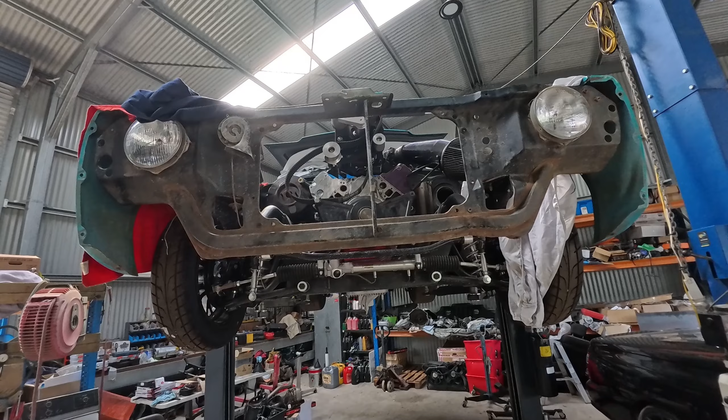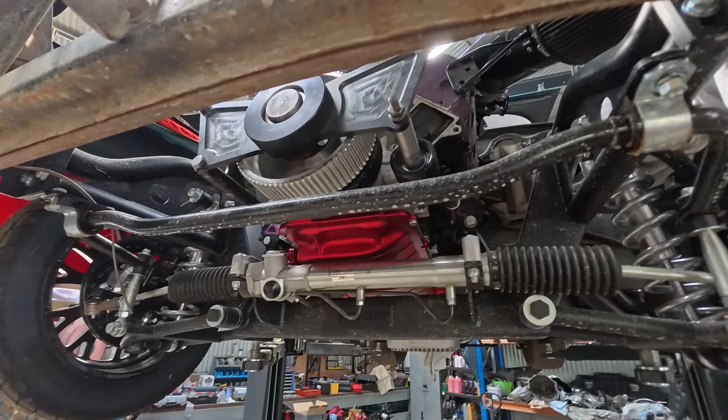Righto guys, so back here today. Today has just been a very big day of, now that we have everything dummied up, finding parts that are going to work, coming up with a list of parts, getting it invoiced, etc. Starting to work out what we're going to run. So Castlemaine make a high mount alt and a high mount AC, which are going to work great.

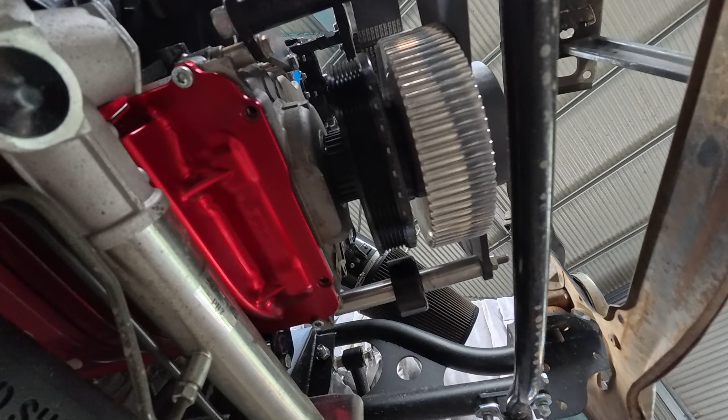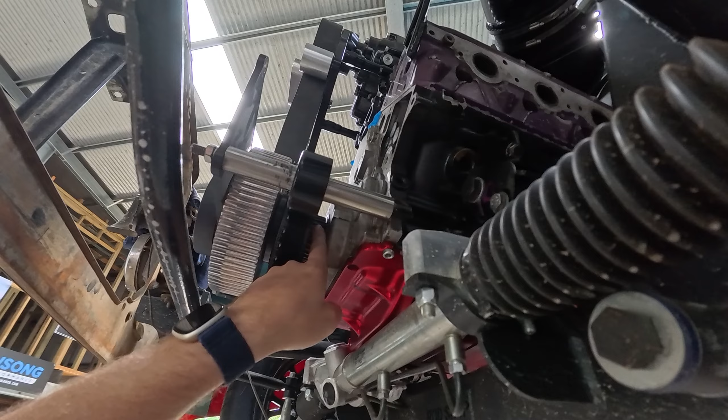Now, unfortunately, as we talked about, the only way that we're going to be able to get this dry sump setup to work the way it is, is to have a pump mounted on this side. We're not going to have enough room for the depth of a pump for it to be forwards from where that's driven from. So it's going to have to be reverse mounted, which means it has to be reverse rotation.

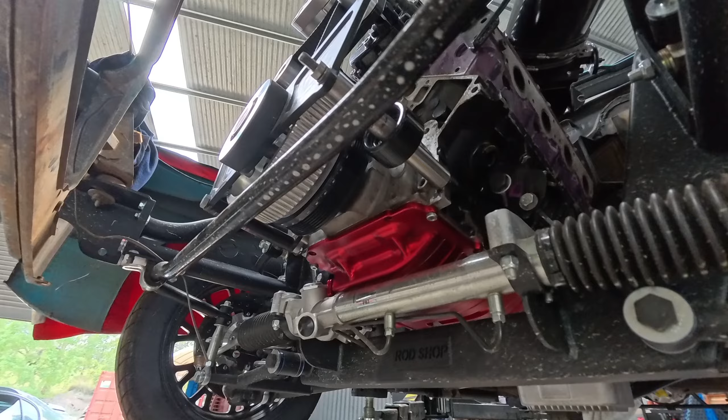And I am frantically asking everyone I know that has a lot more experience in dry sump setups than we do about whether they are aware of any dry sump pump on the market that is reverse rotation or not rotational. We admittedly are not experienced enough to know whether they are rotational or not. We have to assume they are because of the way pumps inherently work.

So if there's any on the market that are omnidirectional or reverse rotation that are going to work, that's about the only way we're going to be able to make this work where this is driven from in the guise that it's in, because of all the stuff we've got going on here and how close the engine mounts are to the front and our steering rack. So it just is what it is. That's what we're dealing with.

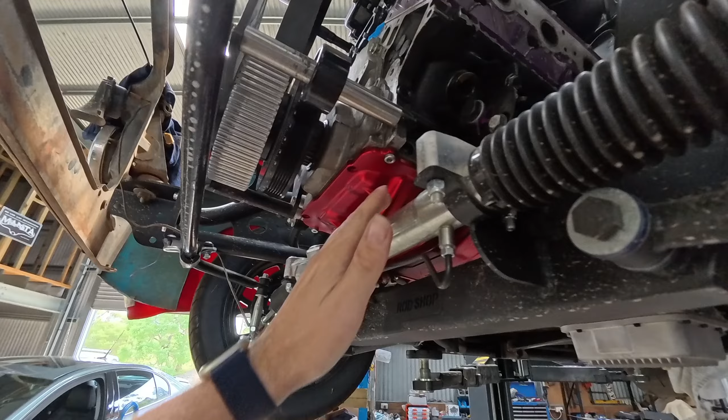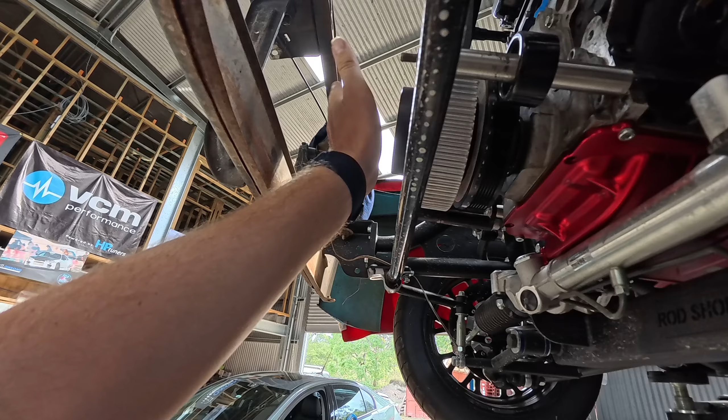If there's nothing on the market that's going to work that way, the only real solution that I can see is to ditch this crank support altogether, hit up Joe Blow and get an internal crank support, which is built into a billet timing cover that supports the crank from back here, and then get an oil pump drive that comes off the front. So instead of having this crank support here, you'd have an oil pump drive off here, which then obviously gives you all of this room here to have an oil pump.

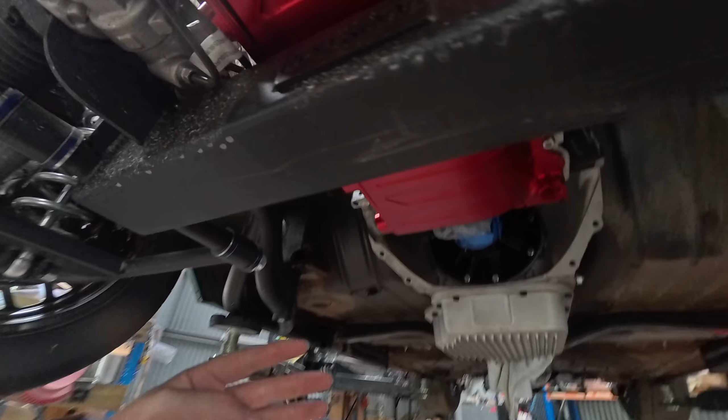It's driven right off the front instead of being driven right at the back from everything and needing all that depth. Obviously, we'd still have to sort out another sump that has all the ports on this side, or at least just the ports at the back on this side, either or. Obviously, we just need a sump that's going to work.

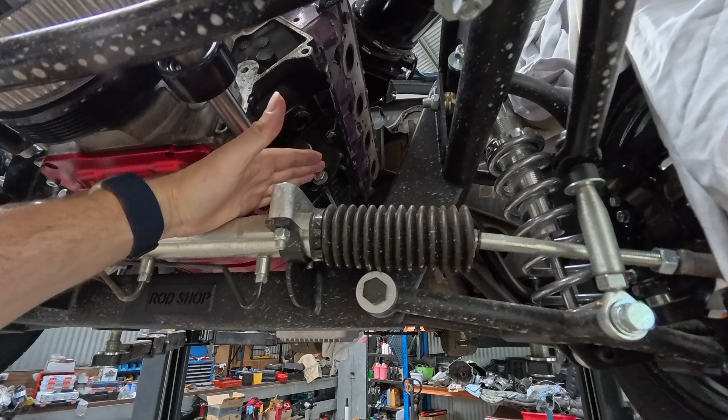And as we talked about last night briefly, even if we went wet sump with an external pump, we are still going to have the same inherent issues of having to mount a pump somewhere. And in the guise that it's in, it's still going to have to be most likely a reverse rotation pump, because we just don't have the depth with that engine mount. And because of the way the front end is all built in one piece and the way the engine mounts are, to modify the engine mount to make this work would just be a nightmare. Not really keen on entertaining that at all.

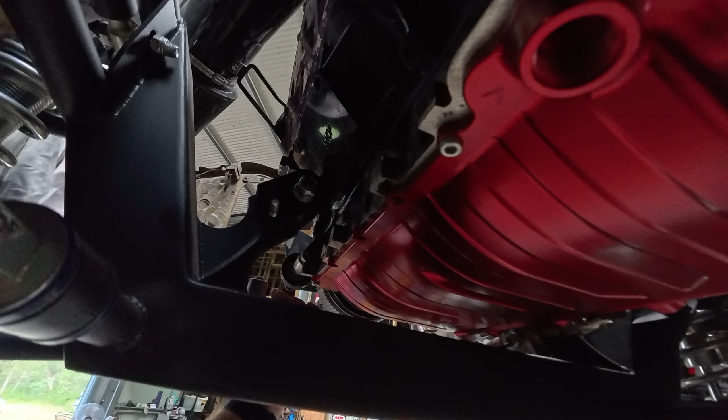It pretty much has to be a solution with the pump side of things and the sump, and not a solution with modifying the engine mount, because the whole way this front end's all built and integrated and the way the engine mounts are, not happening. So anyway, that's where we're at with it.

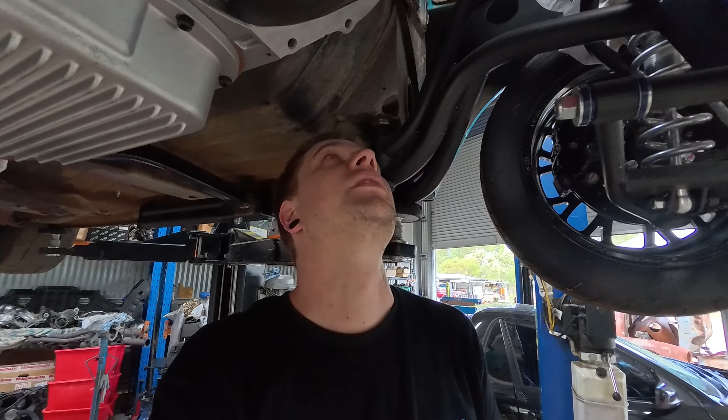Apart from that, steadily finding things. Whipple actually do now make a fly-by-wire throttle body to suit this blower, the reverse entry. We're just gonna have to get one from the States, which lately things from the States seem to get here quicker than anything from Australia. The way freight has been this year, it's been an absolute nightmare.

So otherwise the solution was gonna have to start looking like a 3D designed adapter to go from the blower entry to like twin 110 mil round throttle bodies or something, and run a twin throttle body setup to get the airflow that we need. But anyway, that's going to be a better solution if we can get one from the States.

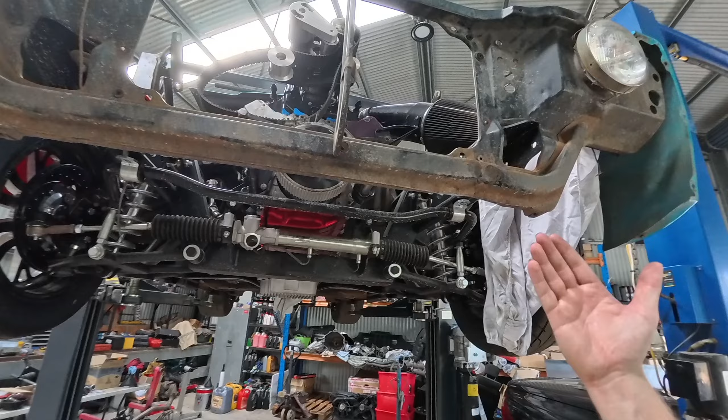So anyway, at this stage it's just planning, finding solutions for the issues we're facing. We've sorted out a radiator layout and got the owner to order a radiator from his radiator guy, steadily working through the issues that have arisen. Anyway, it's all part and parcel as far as very highly custom, highly aftermarket, high performance builds like this go. It's good to showcase it. People, I don't think, realize or understand just how much careful planning, custom work, and solutions to issues go into builds like this.

It's not like it's just a general mechanical thing where everything's just off the shelf, buy it and bolt it in and stuff. And this is why we don't do very many of them anymore, because for how much time we have to put in, we don't really get paid very much, realistically. I've nearly spent all day today just planning out, finding parts, getting prices, emails, asking questions, finding solutions to these issues, and it's not really billable time.

So we do these things because we really enjoy them, and a build like this really gets us excited. So that's why we do these. But yeah, I'll showcase the best I can the issues we have to overcome and the adversity and what happens with these things, because it's an immense amount of work. Not that I've not done it before with HQ, King Barra and that sort of thing. It's been done plenty on the channel, but just so that you can see.

So with this setup, we will be doing a complete intercooler kit as well, intercooler setup. So we'll have our radiator, obviously behind the radiator support panel. We'll have our oil cooler and our trans cooler in front of that. And then in front of that, we'll have a nice big condenser, AC condenser, which is going to work for obviously our AC inside the car, which I'll get to as well, and our intercooler setup. And then the intercooler will be in front of that.

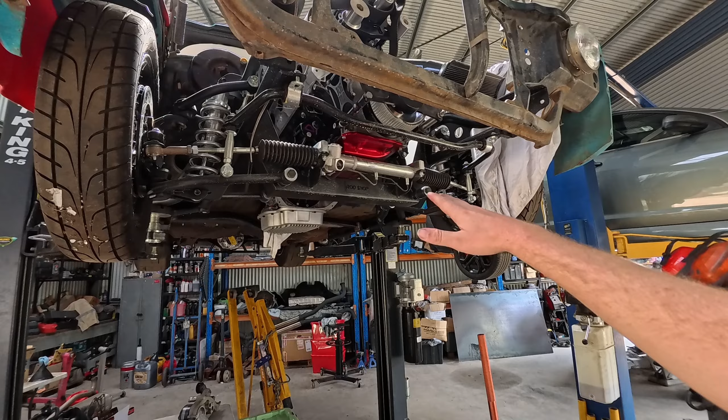Righto guys, another long night and day of finding solutions, getting things together, sorted. And yeah, it's been decided we are going to go internal crank support. That's what's going to happen. We're going internal crank support. We're going to have to order a new sump with fittings on this side or just at the back. Something that's going to work with this steering rack. And with the internal crank support, it obviously gives us this much room for a pump.

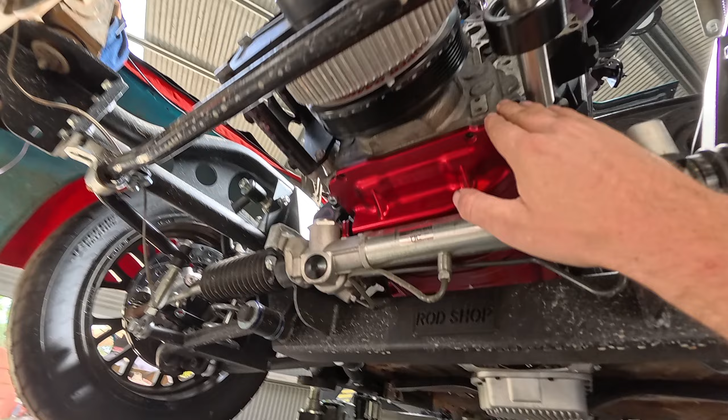So I'm looking at the moment at potentially a Savvy Motorsport pump for the bracket that they make for this side of the engine and the pumps they supply. It appears to me that it's going to be the one that's going to fit with the least amount of modifications. Obviously still going to need a lot of modifying to fit our setup with the blower drive and everything, but it looks like it's going to be the closest. So that's what I'm looking at the moment. I'm just trying to ask a few more people that are more experienced with dry sump setups whether they're a good pump, what they've heard of them, what they know about them, etc. And we'll find out some more info and probably go that way.

So with all that said, we've now got a whole heap more parts on the way to keep this thing moving along. And at the moment, about the last thing, with the interchiller, because of its downward discharge supercharger, we do need to space it up off the ports and put a thermal blanket underneath it. So that's going to give us probably a little bit of extra height on the blower. So at this stage, I'll continue to move my focus back into getting this bottom end sorted and together while we wait for some more things to arrive, and we'll keep on cracking along with this thing. But it's been a huge big step getting the dummy in there and getting a whole list of parts together and getting everything on the way.

So there's a few things that have got to come from the States. So the throttle body is coming directly from Whipple in the States. It's a new oval 2750 CFM throttle body. It's essentially the same throttle body as that one, but it is fly-by-wire. However, they are designed to replace the throttle on the GT500 Mustangs, and they are designed to work with the fly-by-wire motor and TPS off of the Mustang throttle body. So as well as the throttle body from Whipple, you have to get a Mustang throttle body to rob the motor and the TPS off of.

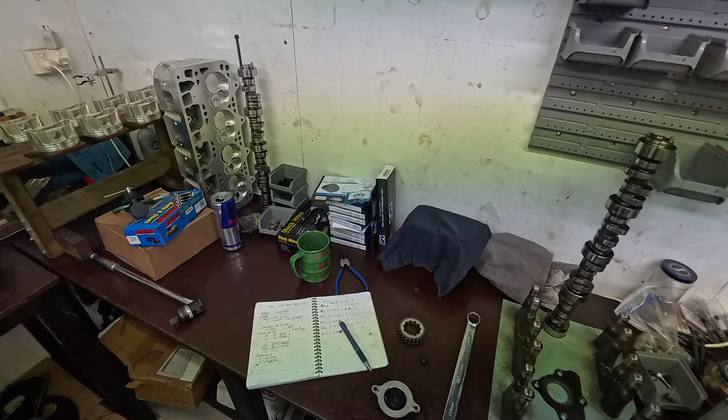Alright guys, so we are finally about to start degreeing in this cam and get this timing sorted.

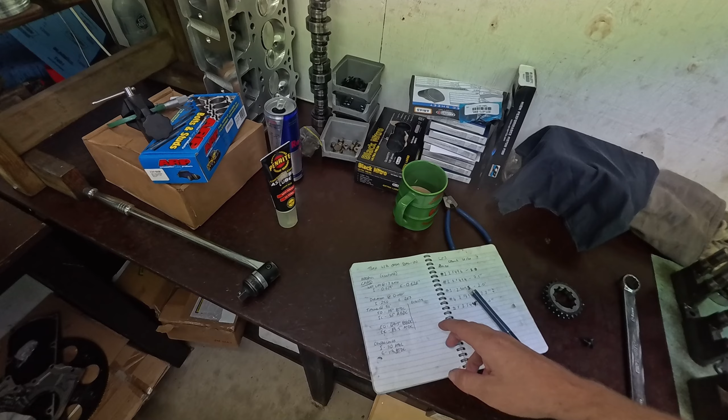So yeah, it's time to degree it in. It is a pretty decently sized cam. It is a 250/263, and the lift at 1.7 ratio is 629/626. Which obviously being LS7, this is actually going to be 1.8 ratio, so the net lift for the valve is going to be quite a bit more than that. So nice little cam. But anyway, we're going to degree it in.

We are going dual row timing chain setup on this thing. Dual row timing chains are pretty divisive. A lot of people love them, a lot of people hate them. Personally, I've always been of the opinion that it's pretty hard to load up a hydraulic roller valve train hard enough to necessitate a dual row, but it is a good little bit of insurance. Now, given that this thing's dry sump, we're not going to have the inherent issues of having too much offset on the oil pump and trying to fit a front cover, etc. on it.

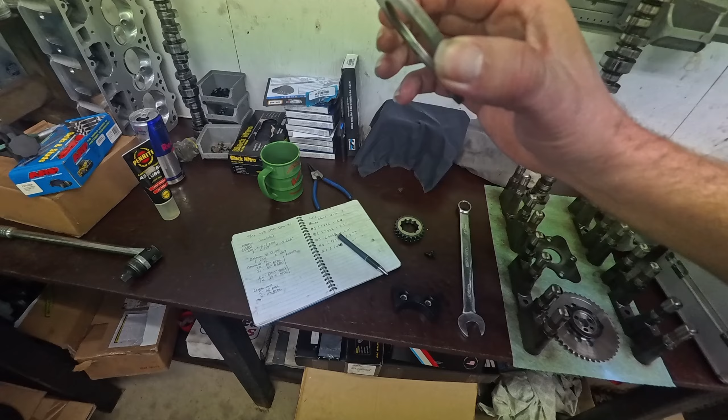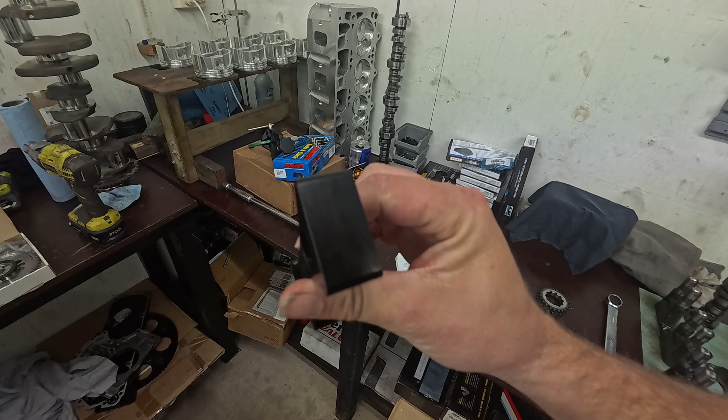So Bo's just done a little bit of a chamfer on our cam backing plate for the Dart block. We also got our custom dual row LS2 timing wedge dampener to suit a dual row setup. They're obviously a bit thicker than a regular one for an LS2 to suit the dual row, and that's what we're doing. So we get this cam in, get it dialed in, degree it up. Be one more thing done, checked off the list.

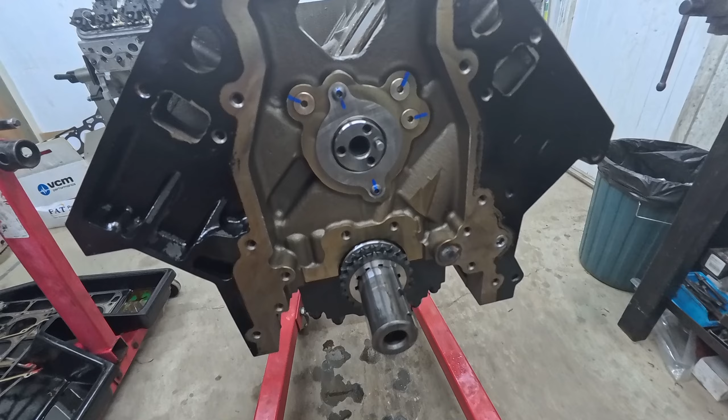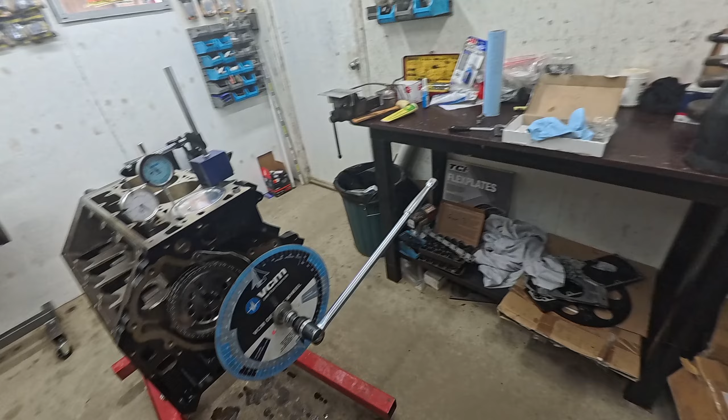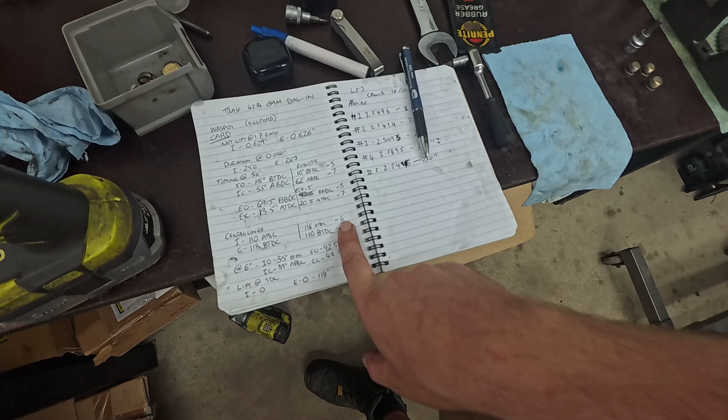Righto guys, so this is why it's always so important to dial cams in, but it does appear that this is about 6 degrees retarded. So I think I'm going to have to advance it 6 degrees to get it right. About 5 degrees retarded on the intake opening, 7 degrees retarded on the intake closing, 5 retarded exhaust opening, 7 retarded exhaust closing, sorry. 6 retarded on the intake center line and 8 retarded on the exhaust center line. So I believe that translates to roughly about 6 degrees that it's retarded.

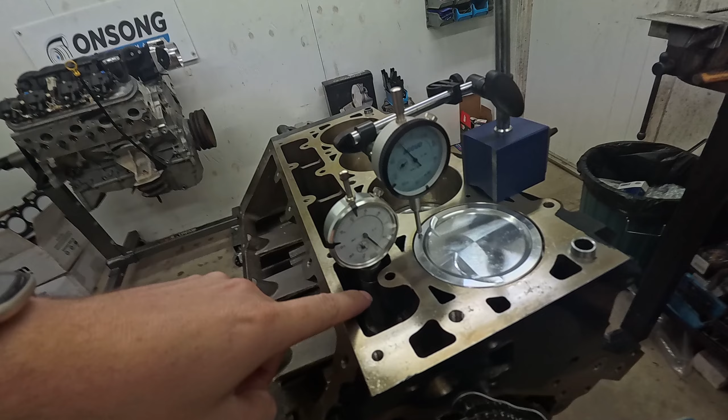Again, the tool we used for the base of the dial indicator to show us the cam events is not perfectly the same shape as a lifter wheel.

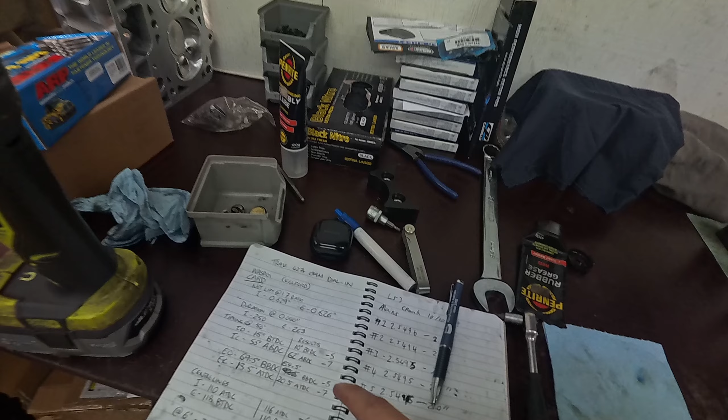So we do find that we do get slight variations of like 1 and 2 degrees. So given that we've got 5 and 7, I'm going to go with the fact that we probably need to advance it 6 degrees, and we should be sort of on the money there. So, well, it's always so important, particularly when you're using aftermarket stuff. So, not always just the camshaft.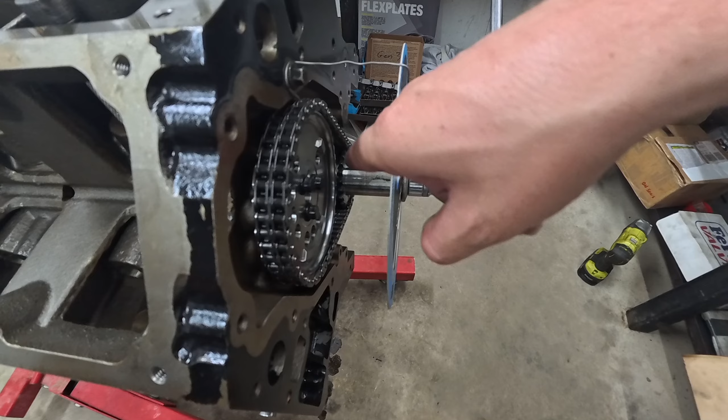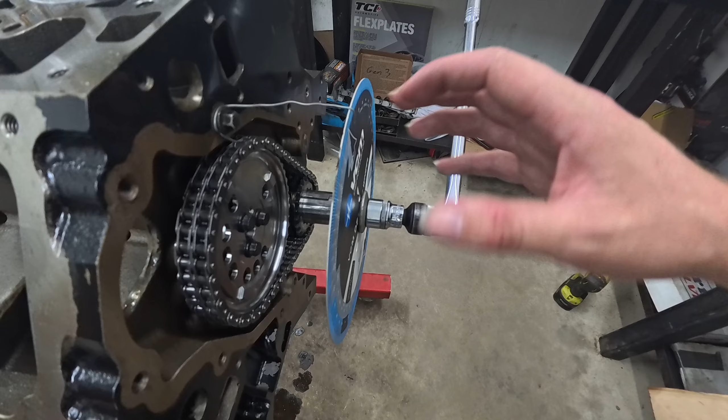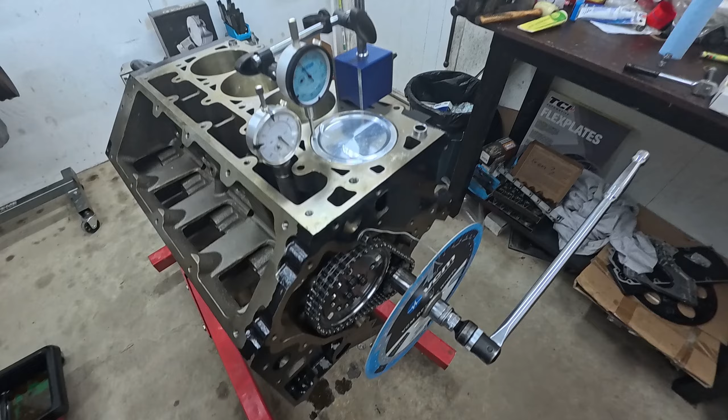It can be that the timing sets that you use can be slightly out, and because these cranks are aftermarket, it can also be that the keyways aren't exactly where they would normally be as well. So, between the keyway on the crank where that's situated, your timing set where they're machined, and then obviously your dowel and stuff on the cam, and then obviously your actual cam grind, all these things can change what's actually happening with your valve events. And that is why it is so important to actually dial it in and check. Always dial them in, every single one.

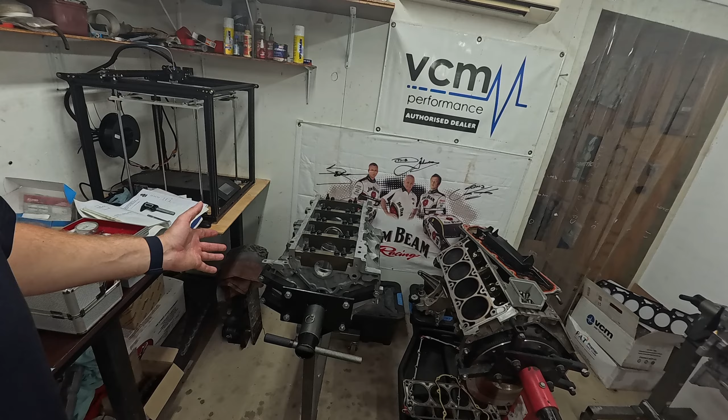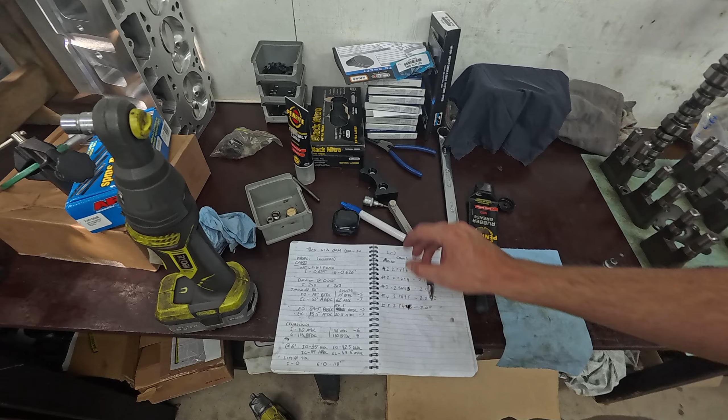So you guys know, generally we have found that with the cams that we normally use in the stock bottom end situations that we normally would do in just cam kits and stuff, usually they're pretty right, they're pretty on the money. But when you're starting to go with lots of aftermarket stuff, that's when you start to get a lot more variation and things like that. All those reasons why it's so important to do all your necessary checks. But if you're building engines like this, I assume that you already know all of that and what you're doing. So anyway, I'm going to pull this back off, advance it to 6 degrees, try again.

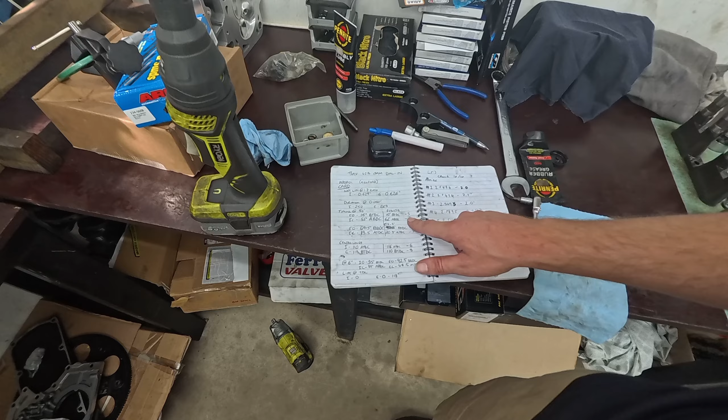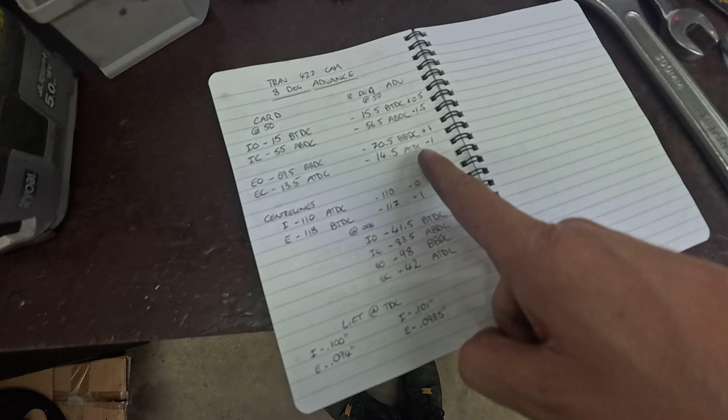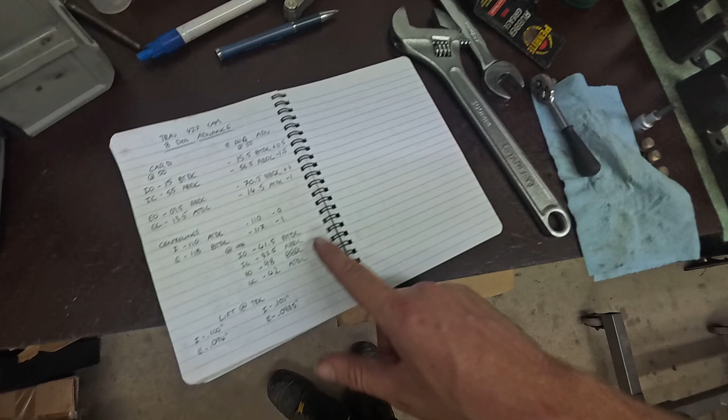Righty-ho guys, so there you have it. We're actually closest to carded at 8 degrees advanced on the timing set. So really close, as close as you get with the equipment we're using. Like you can't ask for much closer than that. But yeah, even at 6 degrees advanced, we were still a little bit retarded. A little bit different to what's carded, but yeah, at 8 degrees advanced we're the closest out of all of them. It could be that the cam was actually ground retarded.

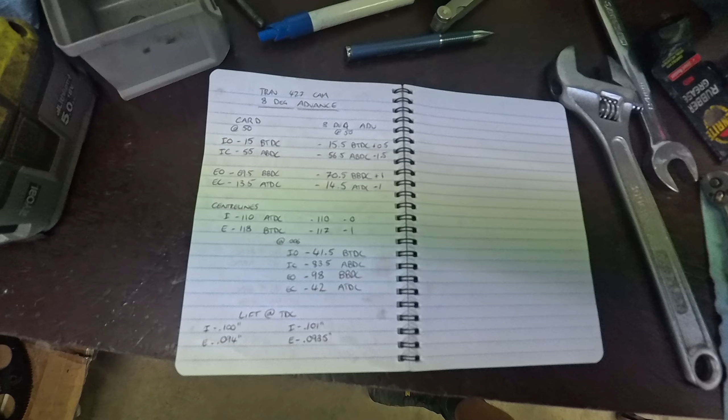The other difference is going to be likely in the crank and the keyway, where the keyway is actually in the crank in regards to the rotation. But either way, we're pretty well on the money there, so that's where we'll sort it out with our final install now with our timing set, etc. Actually use some Loctite, get it all in there properly, and it's all happy days now. There you have it guys, all degreed in, ready to go. Even if it is 8 degrees advanced, it is as carded on paper, so yeah, moving on.

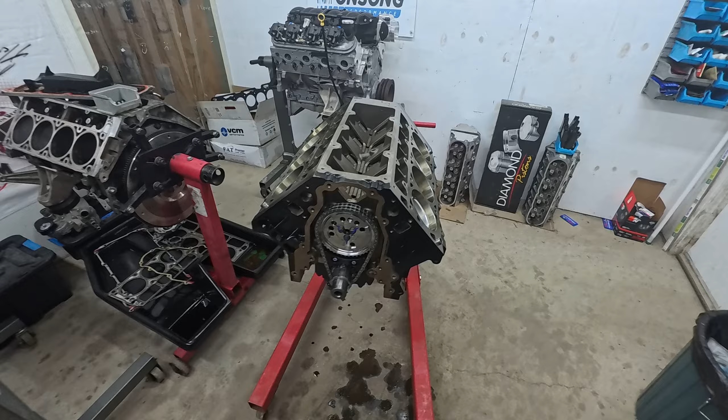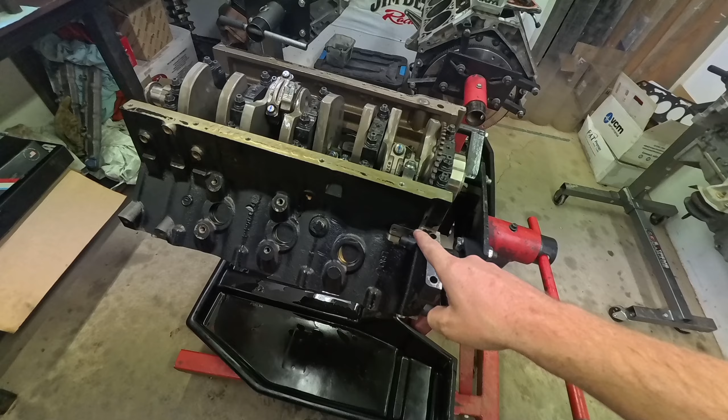Alright guys, so I've just been finalising all the bungs and block offs and stuff in the block, getting all that stuff back in, and I haven't checked our crank angle air gap because I haven't been able to get any late model crank angle sensors for quite a while. They've been out of stock from our supplier. I haven't been able to get hold of any. So what I actually did, I decided just now to flog this out of another engine that we had built for another customer that I don't think is going to need it before we're going to need this one. Hopefully we can still get another one by the time he needs that one. So just a lack of stock.

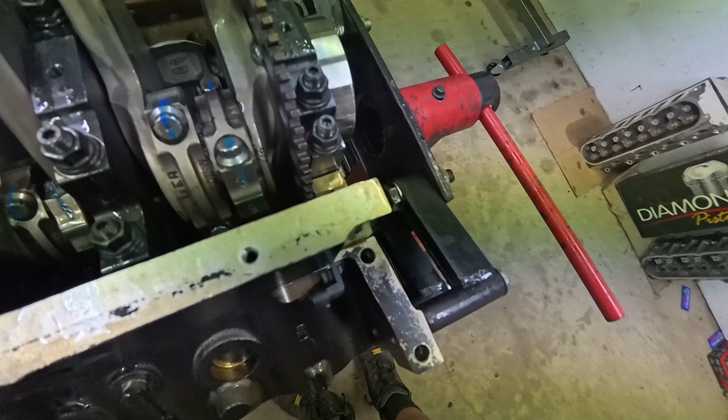Anyway, I've chucked that in, and our air gap for our crank angle is way too big. Not ideal at all. Need to get that much smaller. Need to get that way down, which could be a problem. So this could definitely be a real annoying thing. Definitely caught me out. Should have checked it earlier. Would have checked it earlier if I had a sensor, but didn't really think too much of it, just kept going because of not being able to get a sensor. But it's obviously become apparent that I'm definitely not going to be able to get a sensor by the time this is meant to go in.

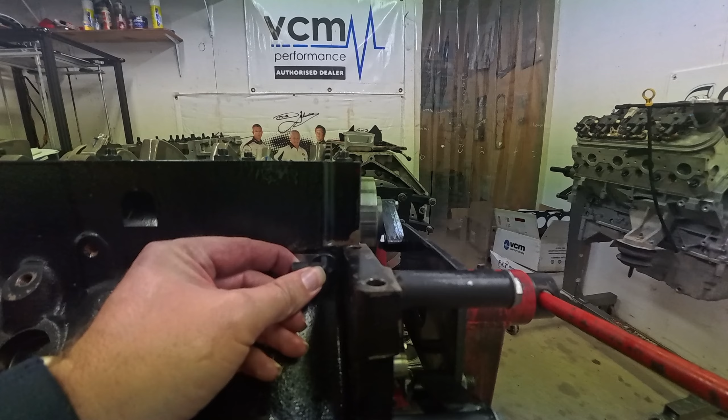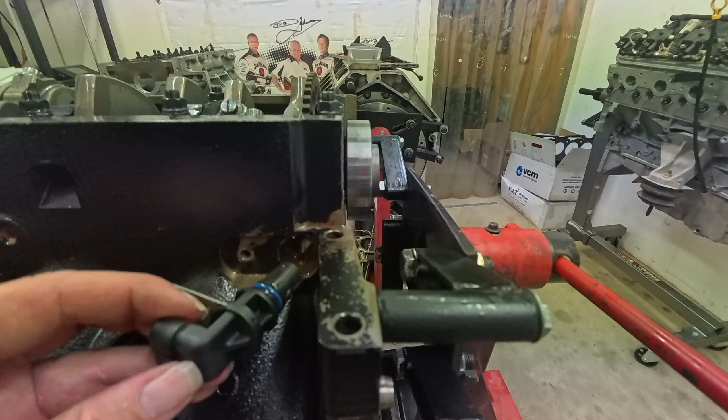So anyway, from the research that I have done, it is supposedly not uncommon for people building Dart block engines to actually have that pad machined down to allow you to get that closer to where it needs to be in there. So that's frustrating and annoying. Hopefully we can come up with another solution, because obviously machining that down at the moment, the way this engine is, is absolutely not ideal. That would be a whole lot of work for nothing, and it would be very, very frustrating. But at the end of the day, we need that gap right, because we can't go having crank angle issues.

It's not going to happen. So I will do some research into the Haltech as well. I'm assuming with the Haltech we'll be able to get away with a lot more gap than we would be able to with a standard ECU. So hopefully we can come up with some sort of solution that's going to work all around. Because if not, that's freaking, yeah, what a way to end the day. Anyway, that is what it is. We'll see how we go tomorrow.

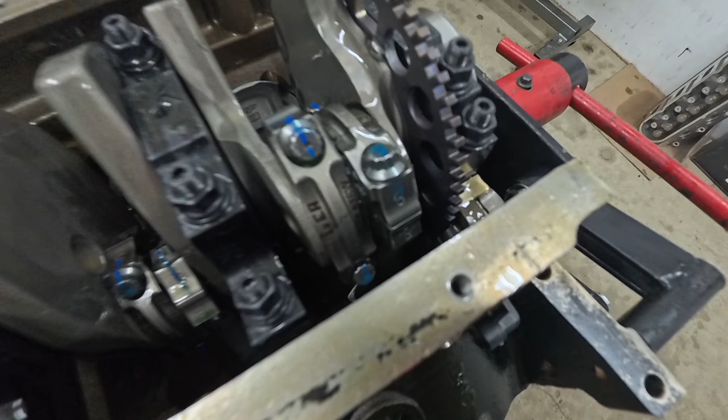Gonna have to sort out a new friggin' paint pen as well. This one is not liking this oil. It's just coming right off. It's a waste of friggin' time. Might see if I can find another paint pen that doesn't just mix with oil and cause that, because that makes it pretty useless having the lines on there, doesn't it? I'm not going to be able to tell anything by the time this is run if that's how the paint pen's going to go with the oil.

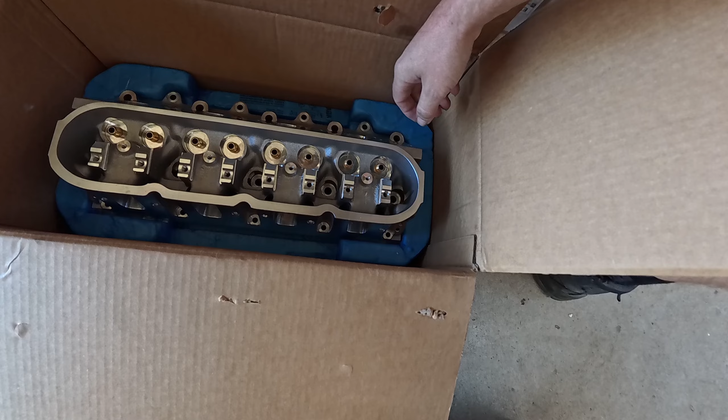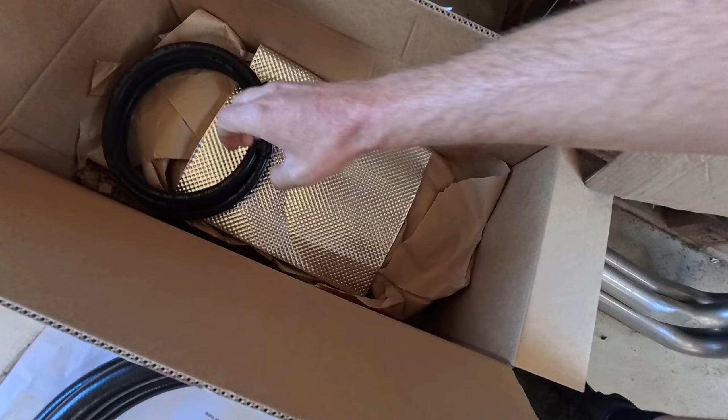Alright, we've got our other BTR LS7 head back, so huge big thanks to Maniac for getting that back to us so fast. They really got onto that quick for us. Huge thank you. We've also got our interchiller kit that has arrived. So, Kirk there from Interchillers, Forced Induction Interchillers, got our kit all sorted for us. So super excited for this whole build, the whole combo of things. Just so sick, man. So sick.

So that's our actual interchiller unit, and the plan is to try and fit that up behind the bumper so it doesn't affect flow to the condenser at all. Our blower spacers, our thermal blanket, everything else involved. So this is not the first interchiller kit we've done, but yeah, really, really like these setups. They're so good. So just everything about this build, I'm so glad we've been able to do it the way we want to do it. Man, it's just gonna be so sick.

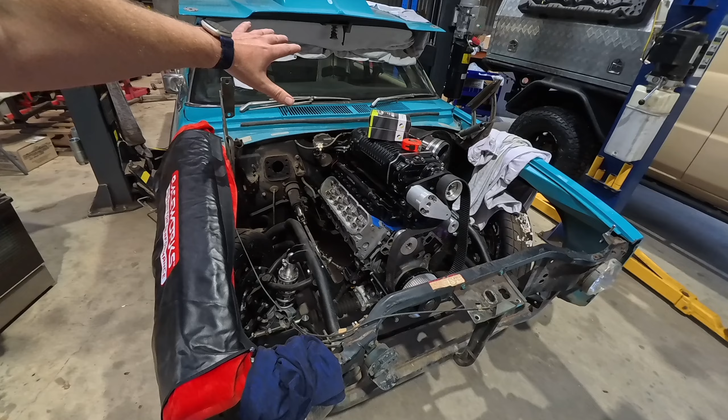So sick. All right, what's up guys? It's been a hot minute. We've got a lot of catching up to do on this thing, and a few other things, but just thought I'd take you through. I've been so sick the past like 2 weeks. Last week I was pretty well bedridden all week, and then we had another car here that cost us another sort of 2 days, so I've pretty much lost just over a week. Bo was sick as well, so we've lost a heap of time, which has been a real mad pain. And just like always with aftermarket custom stuff, you got problems that just cascade, and one problem leads into another, and things just never freaking go right.

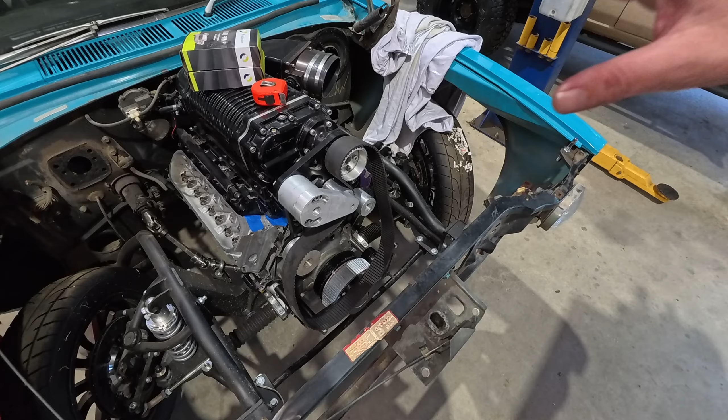We are quickly approaching a deadline, I should say. From us, the car still has to go. Someone else is doing all the brakes, and then the radiator has to get built, and then it's going back to the fabricator to get a scatter shield put in. The inner tubs have to be done, and we're going to get the fabricator to do a few little things for us, reservoirs and stuff like that we want done. And then it comes back to us to get finalized, started, run in, everything else, as much as we can do. So yeah, we've got the high mount AC and alternator on the way.

The interchiller kit is here, and we didn't end up ordering the pump with the AC high mount kit because the bloke who runs Forced Induction Interchillers actually recommended another compressor, which is the same frame as a Sanden 508, but it's meant to be ported. So it's meant to be a much bigger capacity, but fits in the same area as a Sanden 508, which means that with the Castlemaine high mount kit, we'll be able to run that pump, and he very highly recommended that to get the best results out of our interchiller kit, which I'm very happy about.

We've ordered the under dash system. That's the other thing, when it goes back to the fabricator, he's doing a full sheet metal dash, and the idea was that he was going to integrate all of the vents and stuff to our under dash AC system, which I ordered from Retro Spares a month ago. Still haven't got it. I was chasing that up today, trying to figure out where the hell that is. What I ordered is a Vintage Air underdash system, because it's the only one that I could get which was a triple combination of heater core, AC, and defrost on the windscreen, which I wanted to have all in the car. But yeah, unfortunately, I don't know where the frick it is. I've emailed them, haven't heard back, can't get on to anyone.

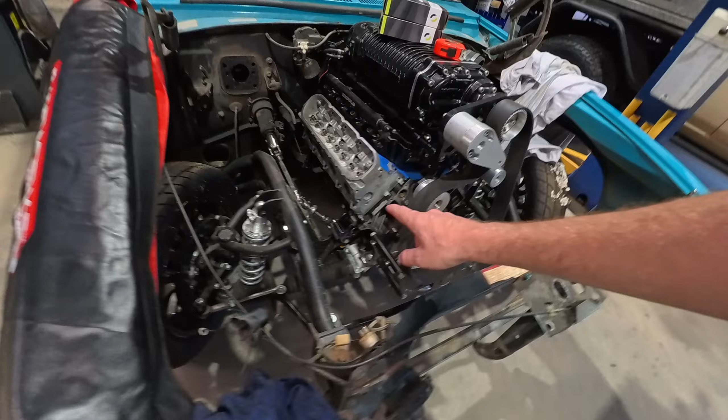But yeah, that was ordered a month ago, and I still have no updates on where the hell it is. So that's a pain. Still waiting on our high mount accessories to come from Castlemaine. And today I've been going through all of the dry sump system, trying to get all that ordered. And then we've been on to Velocity Engineering, and he is going to make us a new port fitting for the sump, which will remove the front port, and that will be flush.

And I've checked it. We can get a banjo into the steering rack. As long as that's flush, it'll all work. We'll be able to run the sump, which is great. So that takes it from a 5-stage down to a 4-stage because we only have 3 scavenge ports plus our pressure stage. And then we're trying to figure out where we can fit an oil reservoir if we can just buy one. Otherwise, we're going to have to get Wagon, the fabricator, to make one that's going to suit, which is looking likely at this stage. So yeah, trying to work through all that.

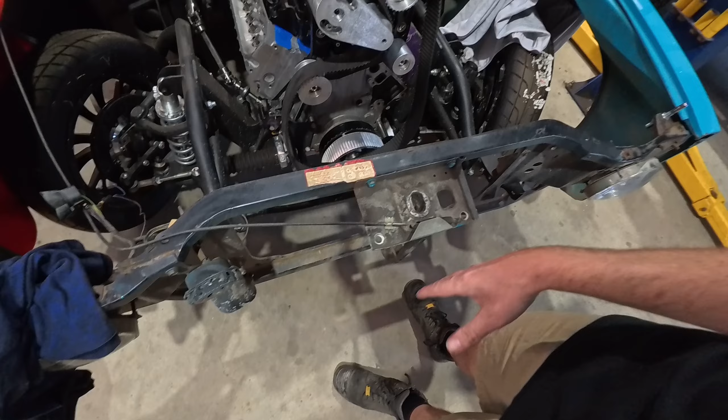We're at a point now where we can start basically mounting all our stuff in the front that we need, start mounting all the stuff in the back that we need. We've ordered a bracket for the power steering pump from Low Industries, the electric power steering. And then we can sort out our plumbing and we can start wiring up and try and get that sorted. But at this stage, it is looking like it's probably going to have to go from here the first time with the dummy engine in it. Reasons being, I will get into in a minute. Sort of where we're at the moment.

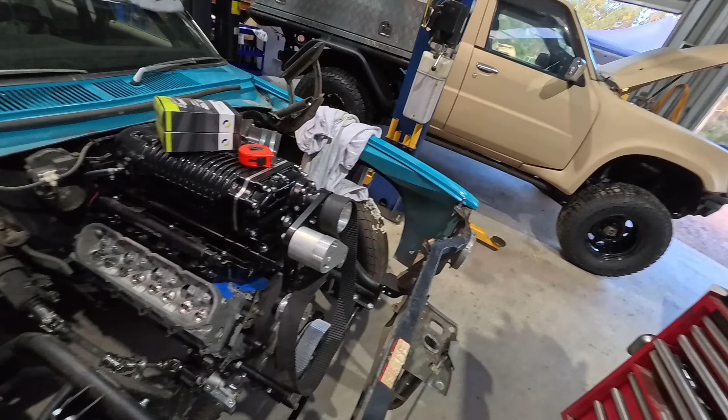The other issue we've got at the moment is I'm trying to figure out what to do about injectors. It's got 2200 CNG injectors at the moment. We all know, any tuner knows, CNG injectors are rubbish. They're absolutely terrible. But you can only get non-CNG injectors that aren't for methanol and that sort of thing up to about 1500 cc or 1650 cc at 4-bar, which is not quite going to get us exactly to where we wanted to be. So we're trying to figure out what to do about injectors. At this stage, we're probably just going to run the 1650s, and it's just going to have to get to where it wants to pull up, and we'll have to worry about it at a later date because we're running out of time on the deadline.

At the end of the day, that's up to the owner. He's the one that wants it all done by this date. So we've got to sort of work within what he wants to get it done by and what we can do in that time. And at this stage, we're still thinking just the good 1650cc at 4-bar Bosch stainless steel injectors, because we know they're good, we know they control really well. Either that or actually probably the 1500cc, which are also 1650cc at 4-bar, Xspurt, because they come with really good data. So probably one of those two, and it's probably going to end up making about 1000 wheel, and that's probably going to be where we run out of injector for that.

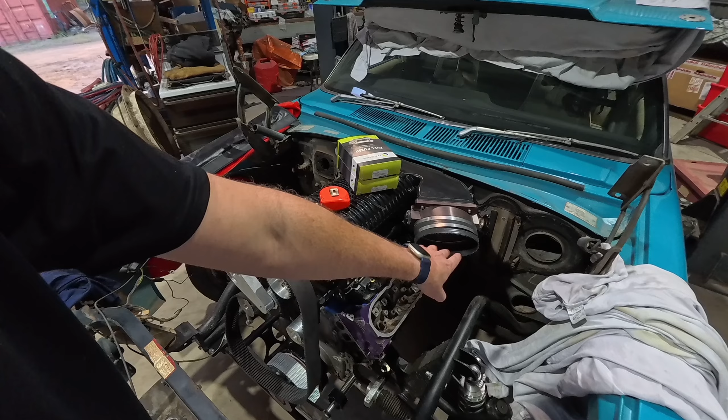But we'll have to do some research, see with these blowers whether you can run auxiliary injectors in the intake just to get some more fuel happening. You know, it will be pretty borderline. We'd only need probably 2 or 3 more injectors in the intake tract to get to what we want to get to. But anyway, again, there's only so much we can do in the time we've got. So many friggin' problems we can figure out and do in that time. And the frustrating thing is, like I said, guys, it'd be probably over 80 hours of just sorting the stuff out. And the problem is that it's really hard to charge for that time on these projects. And that's why we don't really do them. But it is what it is.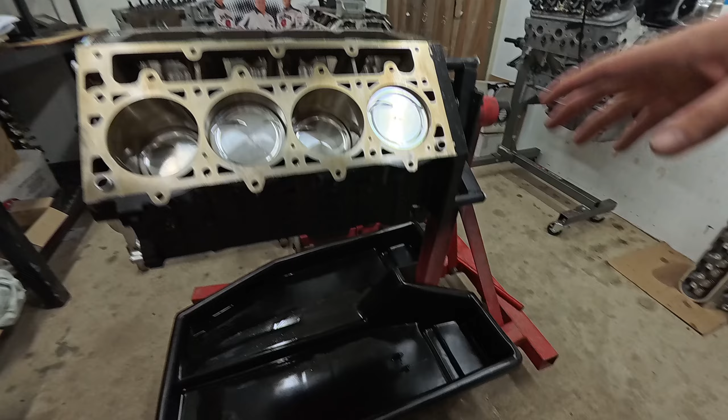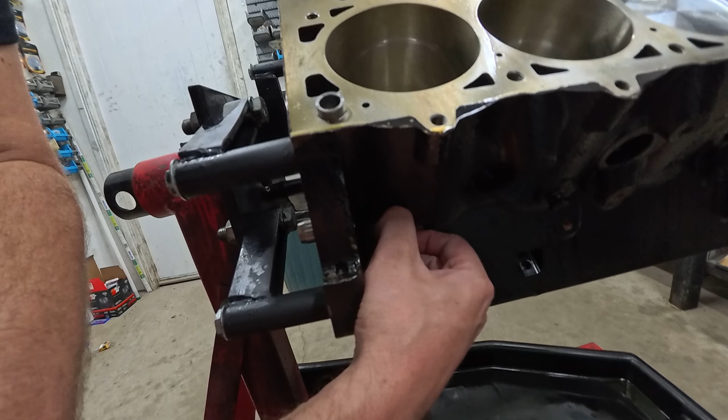So anyway, now we'll get into where we're up to with the engine and what's going on there, because heaps of fun there. All right, so where we're at with this engine. I think last time I signed off, I did talk about the fact that our crank angle sensor air gap's far too big. And what we found out is with these Dart blocks, the very early runs of blocks, there was a problem. It was a pretty renowned issue. I know Troy Worsley has talked about it before, but essentially what needs to happen is that this pad that holds the crank angle sensor needs to be machined down in order to close up the air gap between the sensor and the reluctor wheel.

So I am going to do that. Our boys there at SP Automotive, they're just going to do it on the day. So Friday, I am going to take this down, have it machined, close up that air gap to what we want, and you can always shim it out if it's too tight. But obviously if it's too far out, there's nothing you can do. So they're going to machine that on the day. So Anzac Day, I'll be pulling this back down. Friday, I'll go for a trip, get that sorted out. Come back, I'll put it back together on the weekend, which is a pain, but it's just pulling it apart and then putting it back together.

I don't have to redo bearing clearances. I don't have to re-dial in the cam. It's going to be the same crank, all that dialing in, all that's done. So it's not a huge job. That's why I'd rather just do it now. Then it's done, and I will know that we're not going to have issues with the reluctor wheel, because that's the last thing we're going to want.

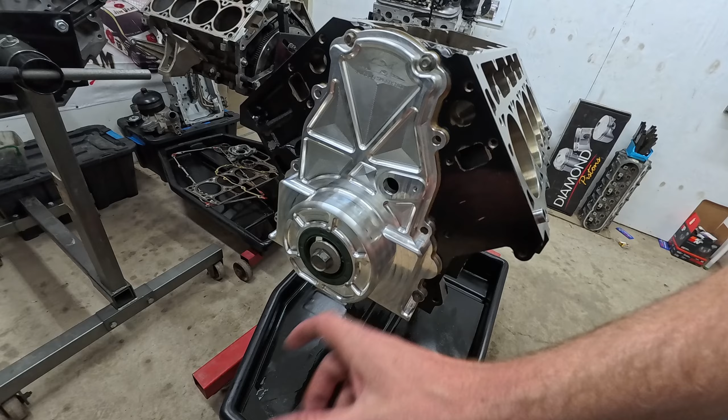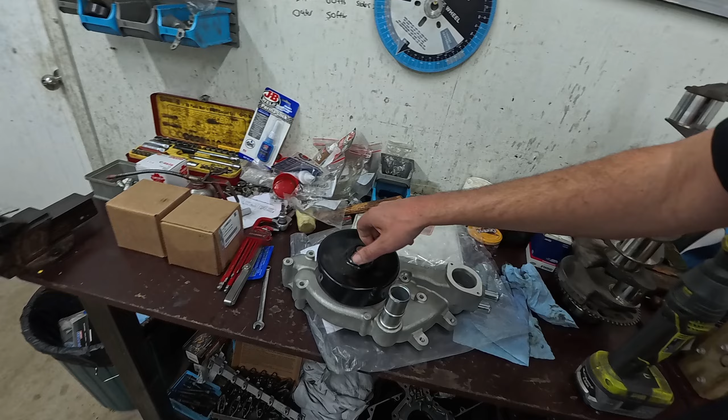Now, the other thing is we've got our new internal crank support. As you can see, really lovely piece of kit from Joe Blow Speed Shop. Really nice piece, and it comes with the sleeve to suit the ATI balancer, so internal crank support instead of external, so that we can have the drive up the front. Now the problem is that because of our high mount accessory situation, we were counting on using an OEM water pump to keep our belt route to make our high mount accessories work. Unfortunately, because of our new internal crank support, our water pump does not fit. Fouls on the crank support. It's not much, but it's just enough.

You'd probably need about 4 or 5 mil spacers to space it out. You can buy them, but we've checked it on the dummy engine, and we don't think it's going to work. We're pretty sure if you space it out that much, it's not going to work with our Gen 4 offset, and the belt will then run against the pump. Not only that, they do make those spacers, but there's no one in Australia that I can get some from before this deadline. So I'm trying to figure out how to go about this water pump situation.

I've emailed Joe Blow Speed Shop to ask them what they advise. They reckon the Meziere electric water pumps fit fine, and that's all well and good, except because we're relying on that water pump to keep our belt route for our high mount accessories, I need a water pump that has at least an idler. The problem is I can't get onto anyone that can give me any sort of engineering drawings. Meziere do make an electric water pump that has an idler fitting, but I cannot find any information about whether it's actually going to clear this crank support. And you're talking about like a $1,800 water pump. It's a bit of a gamble to spend that much money and have one get here and it still fouls anyway, and you're no further on than you are right now.

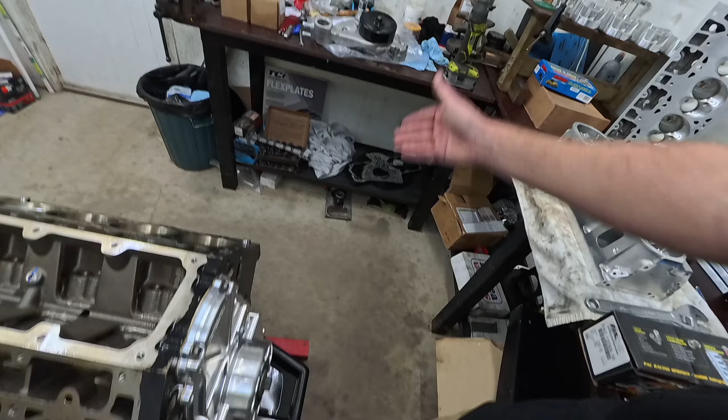So again, guys, just an example of things cascading. A lot of people think this sort of stuff is just remove and refit and everything just bolts together like Lego. It's not the case. We've got an aftermarket engine block, we've got issues with that. We've got a full aftermarket Castlemaine front end, rack and pinion, and that's caused us problems with our completely aftermarket dry sump.

And then because it's aftermarket cross member, steering rack and then aftermarket engine mounts, that's caused us problems with room with where we can mount a pump, which has severely limited our options as far as the dry sump setup goes. And then because of those limitations, we weren't able to run the external crank support, which means we have to drive the pump off the front, which means we had to go an internal crank support so we could fit the oil pump that we want to fit, which is still going to have to be on a

custom mount. And then because we've gone to the internal crank support, now the water pump doesn't fit. Then we're going to have to look at trying to go aftermarket water pump, and you could see just one problem just leads into another, and it just does my head in. Very stressful, but it is what it is.

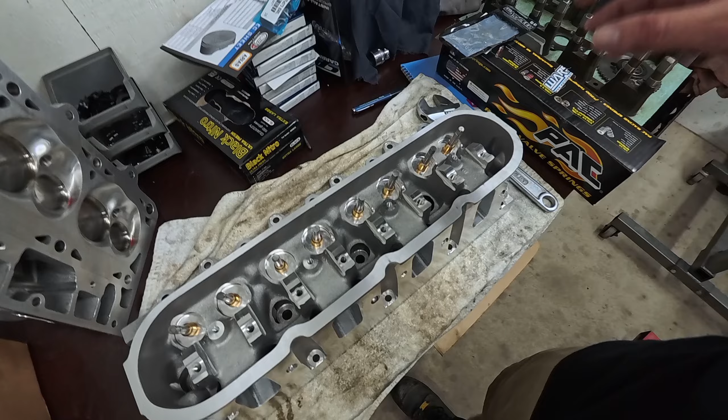The other place we're at is our freaking wicked shaft mount rockers are not really going to work with these heads the way we thought. You do have to machine the heads to fit the shaft mount rockers, but these heads must be a slightly different casting to what the supplier who we got those rockers off thought they were, and where you have to machine down flat and then retap to suit the shaft mount or the shaft rail, there's not enough meat.

So a lot of other BR7 head castings, they seem to have basically meat all the way around this head bolt between the two rocker posts that are there, and then you can machine them down and you retap. The rocker post lines up with 4 of these holes, the other 4 have to be retapped. But from what we can see lining up the rail, even if we were to machine these down and retap them, the hole's going to end up half off the post, and there's not enough material there for us to actually tap that hole, and you can't get it down flat because you'll end up in the intake port roof.

So unsure what's going on there. It's one of those things that's just getting too hard. We can't get any confirmation on whether there are any shaft rockers that will fit this particular casting, and we've run out of time, and it is what it is. This is one thing that I should have definitely checked earlier, but obviously I was at the time trying to

get this freaking engine together, and this head had to go back to get the valve guide fixed, and by the time everything's back here, this is just where we're at. So this one's my fault, this one's on me. I should have checked that earlier, but unfortunately it means we're gonna have to wear that cost anyway, so it is what it is. But I've just ordered some standard OEM LS7 rockers.

So at this stage, because these heads are designed to work with standard OEM rockers, that's why these posts are in there. We're just going to run LS7 rockers with CHE trunnions. They're going to work for what we want to do. Would have been nice to have the extra security of shaft rockers, but obviously we've never had a CHE rocker fail, and I don't believe we'll be loading up the valve train that hard that it's going to cause us problems. Anyway, it is what it is, but that's where we're at with it.